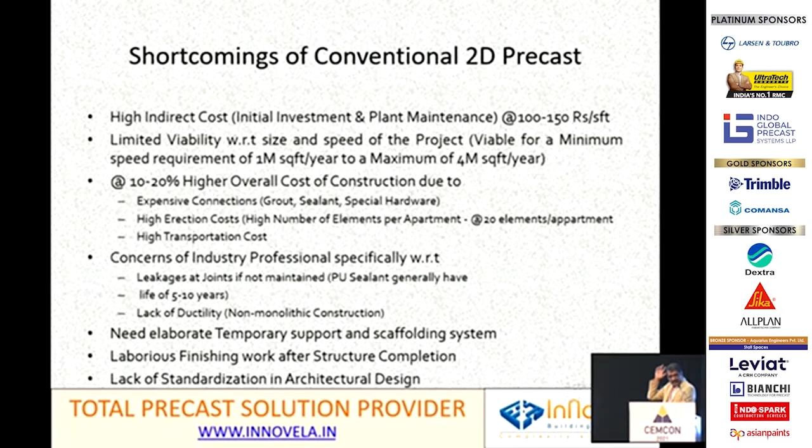So there are a lot of avenues where architectural designs can be improved to suit precast concrete technology. And if the client decides early, at an early stage, to adopt precast concrete technology as a strategy, then the architectural design can be developed keeping the precast concrete technology in mind, by having standardization in architectural design.

So what is the benefit of standardization that we are looking at? Because of optimum mold utilization, the reduction in capital investment will happen - that is only going to happen because of standardization. If I have 20 different elements to manufacture in a single apartment, then my cost of molds is going to be higher. But if I'm going to do that using only 7 or 8 standard elements, then of course my initial investment comes down.

The increase in project viability happens because of the lesser indirect cost, and the automation process can be implemented on such standardized units based on the efficiency requirement - what is the speed requirement. So to that degree, we can automate the processes. Of course, there is economy of scale which is involved once standardization comes into picture. And the last point, which is very important and which everybody needs to strive to go for.

We need to have precast products selling off the shelf, with the main contractor buying the stuff from precast suppliers and erecting it on their projects. That is what happens in Europe. The project is never awarded to the precast manufacturer directly. The project is awarded to the main contractor, and the main contractor's subcontractor is the precast manufacturer.

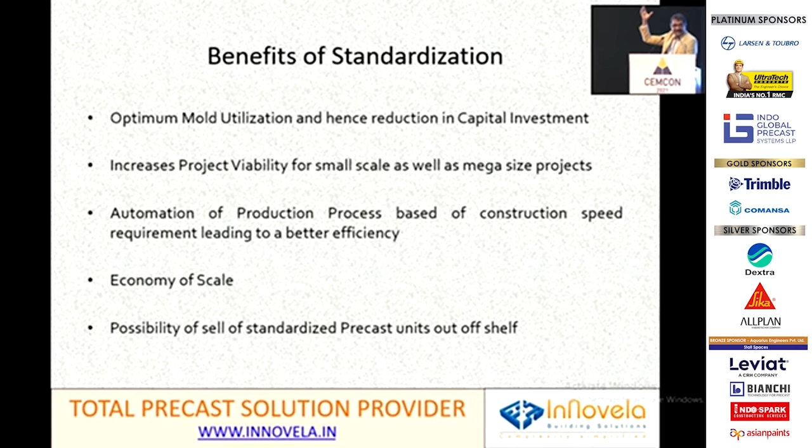So the precaster's role is only to manufacture the element and transport it to the site. And that is where the major possibility of what Amit's dream is, having a centralized plant, will come into picture or come true. So we're trying to do that.

So, introduction to out-of-box construction. This kind of concept has been in our mind for more than 3-4 years. In the initial 6-7 years we realized all the shortcomings in precast concrete technology. We said we need to improve it for India, because the same technology implemented in Europe, USA, Far East countries like Singapore, or the Gulf countries, may not work in India, because India is a different culture with different kind of living habits. So we need a solution which is India-centric, and that is where we developed this out-of-box construction approach.

That is what we are calling it. The aim of this construction approach is to achieve a high degree of standardization at the time of concept design itself, and second, to reduce the overall number of precast elements required per apartment, thereby reducing the cost of logistics considerably.

Now when we look at any residential apartment, the kitchen and toilet are the areas which can very easily be standardized. Nobody's fussy about kitchen size or toilet size — they're more worried about living rooms, bedrooms, and those kinds of things. So for example, for a 1BHK apartment, we say 2.4 by 2.4 as the kitchen, and maybe 2.4 by 2.4 consisting of 2 toilets as the toilet block. And maybe we can use the same for 1BHK as well as 1.5BHK, or maybe something different.

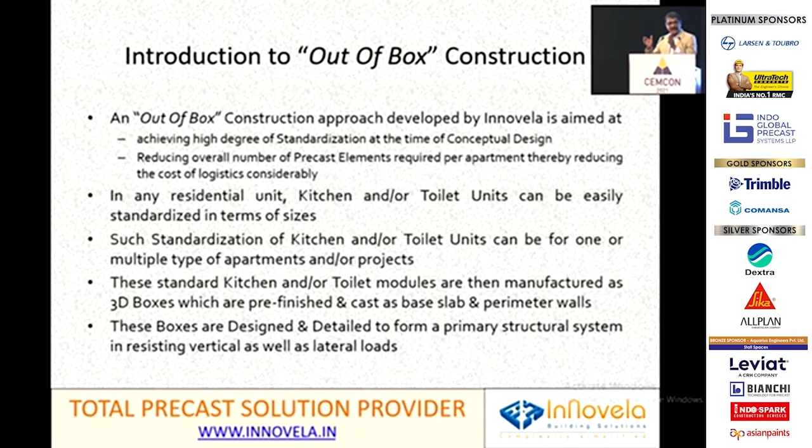What are the benefits of such construction? One is lower indirect cost — we are currently doing two projects using this concept, and we find that instead of 20 elements, I can do the same apartment in 12 elements. That means I'm reducing almost 40% of my number of elements, so my crane sizes and number of cranes required have reduced considerably, even though crane capacity requirement has gone up. My stockyard becomes suitable, and all my logistics become easier.

It also improves viability for smaller projects as well as mega projects. For example, I'll showcase case studies for two different projects. One project is 1,000 apartments to be built at a speed of 1 year — you can say 3 or 4 apartments per day. The other project is 1 lakh apartments, a smart city housing project, where we need to build 80 apartments per day. So from 4 apartments per day to 80 apartments per day, but the concept we are using is the same — that's the kind of scalability we are looking at.

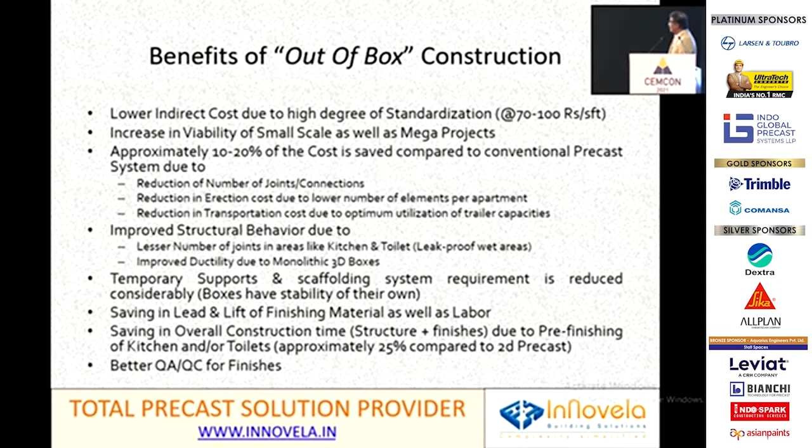That's the typical connection we are talking about, because the pods are manufactured with a base slab, and there's a peculiar challenge of erecting such kind of pods at a higher level. That is what we faced in L&T's first project, Boivada. We used this kind of system, or a very similar system, where we used WC and bathroom, very small units, 1.2 meter by 1.2 meter or so, 7-ton element, which was not pre-finished also because of some other reasons, since excise duty was there at that time. So it was better that we didn't finish that.

But now with GST coming into picture, it's a level playing field for everybody.

But what we found out is that the erection of such pods becomes very difficult, because the erection of the pods has to happen, and then the remaining structure comes around it. So we have improvised it in terms that on top of the wall of that pod, we have a corbel kind of situation, where you first put your slab on the lower pod. Once that access is there, then you erect the next pod, and screeding happens afterwards on top of the hollow slab. That is how, from an erection point of view, we have taken care of this.

And again, when it comes as an external joint, we are actually projecting out our base slab, so it hides my horizontal joint which is going to happen. And I'm totally avoiding my horizontal sealant requirement altogether. So that is what is saving my cost, and from a maintenance point of view, I'm not worried either.

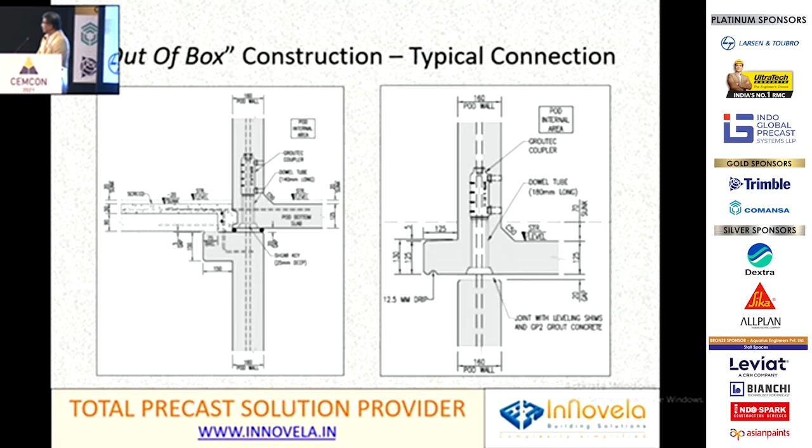Now we are going with the case study. This is the kind of apartment plan that has been developed.

Actually, this is the project where we need to do 80 apartments per day. So we were not really bothered about the element weight as such, but we wanted to really cut down on the number of elements drastically.

So what we did, we actually did kitchen plus toilet as one single unit. That's the L-shaped pod that you look at. And then the bedroom and living room is formed in conjunction with that. But my main load-bearing element is the kitchen and toilet unit, which is cast as a 3D element, a standard modular 3D element.

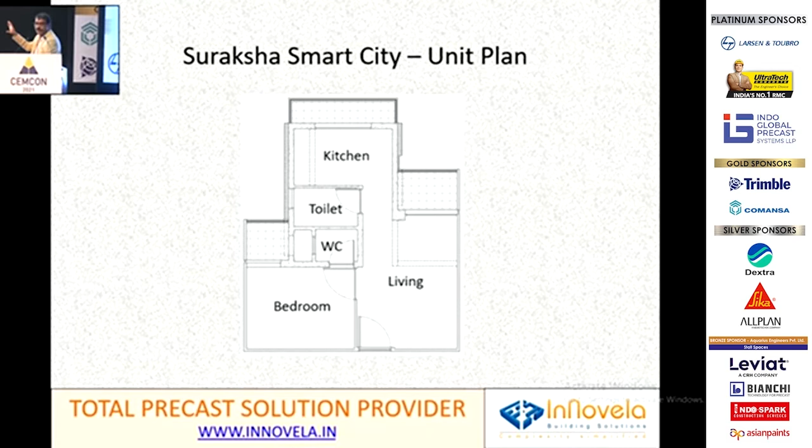This is the typical building plan. You can go to the next slide.

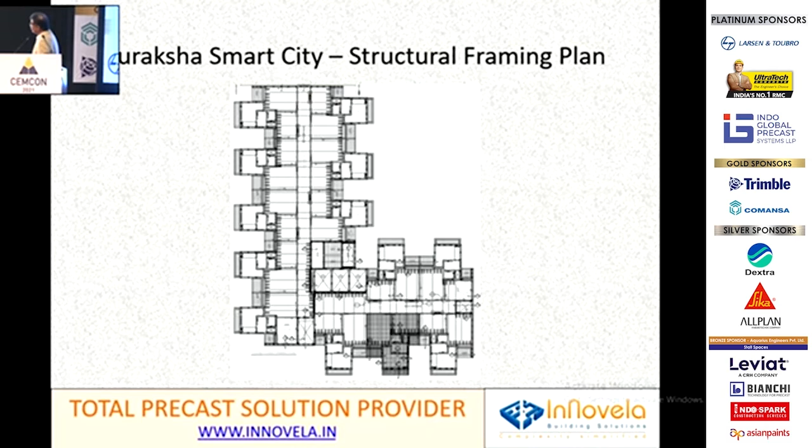Structural framing plan, and this is how the manufacturing of the pod is happening. Such 80 pods we are going to manufacture every day, once our state-of-the-art plant is going to be in position, maybe in the next 6 months' time. And we are having a lot of automated systems in order to achieve these kinds of things.

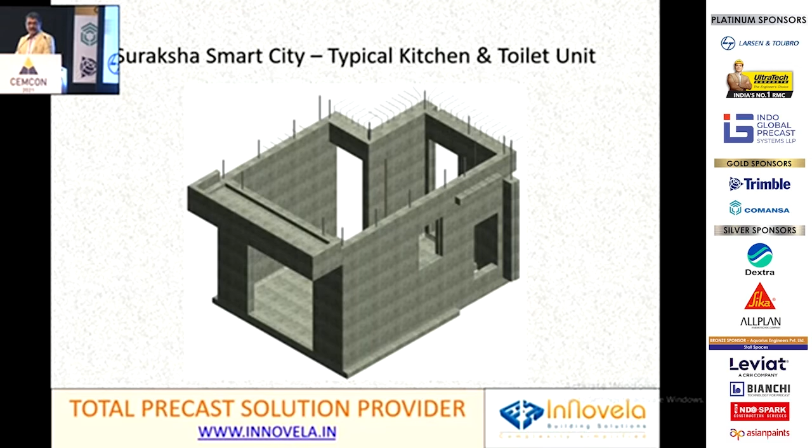Steam curing is the most important aspect of all those things, and it's a carousel system with which all these things will be manufactured. The base slab actually helps in doing that as a carousel. So all those things we are doing. There's kind of an animation which goes.

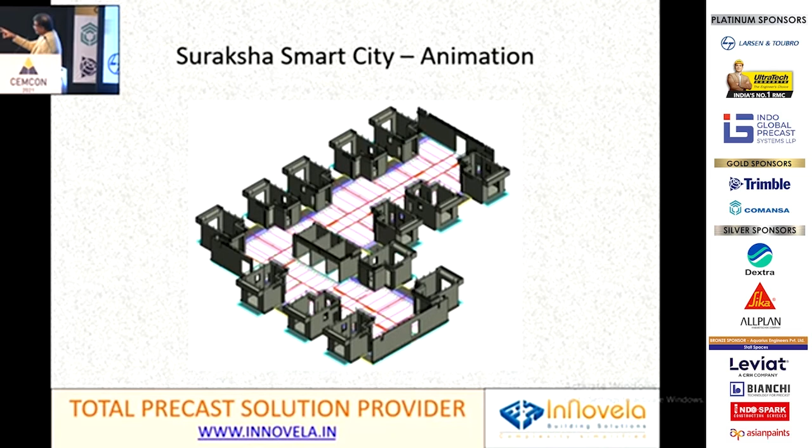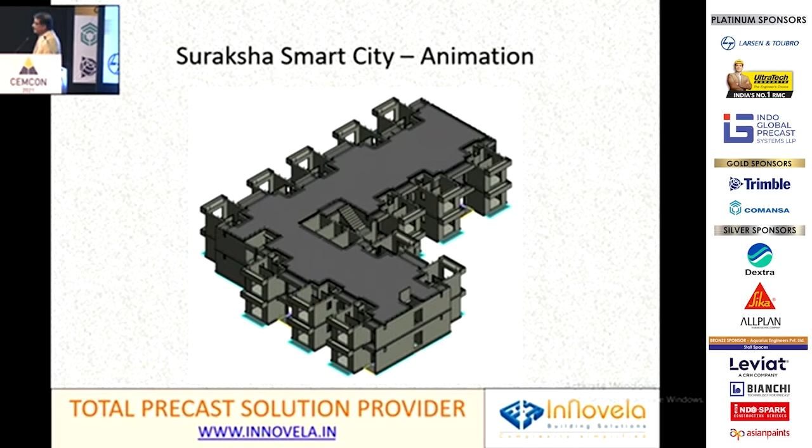So even the lifts that you see over there, those are also made modular. So we are trying to make as many modules as possible so that we can reduce the number of elements to as high a degree as possible. We can go to the next slide.

Another project is a 1,000 apartments project. This is the Light House project at Ranchi, driven by the central government. There are 6 technologies which have been shortlisted. 3D precast technology is one of them. Now, if you go to the previous slide, you look at that kitchen and bathroom.

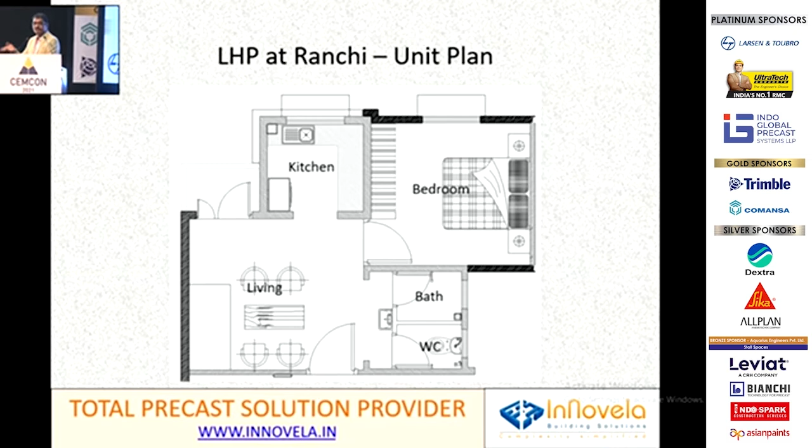So what we are trying to do over here, because these are only 1,000 kind of apartments, we wanted to create one single mold which can manufacture kitchen as well as toilet. So my kitchen is the same size, 2.4 by 2.4, and the bath WC and the passage that you see is also again the same size, 2.4 by 2.4. So I'm having only one typology of mold which can produce both these elements, kitchens as well as toilets. We can go to the next slide.

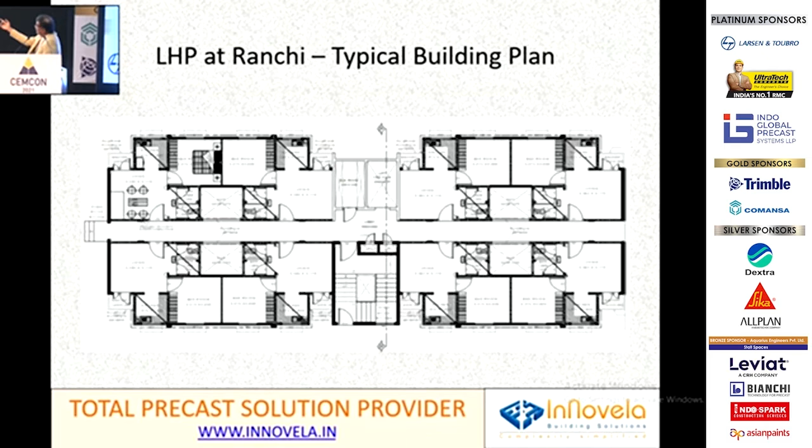And these then become my main load bearing elements. Next slide, please. Yeah. So my slab actually spans from kitchen pod to kitchen pod in the horizontal direction and the vertical direction also. My toilet pod is there as the main lateral stability element.

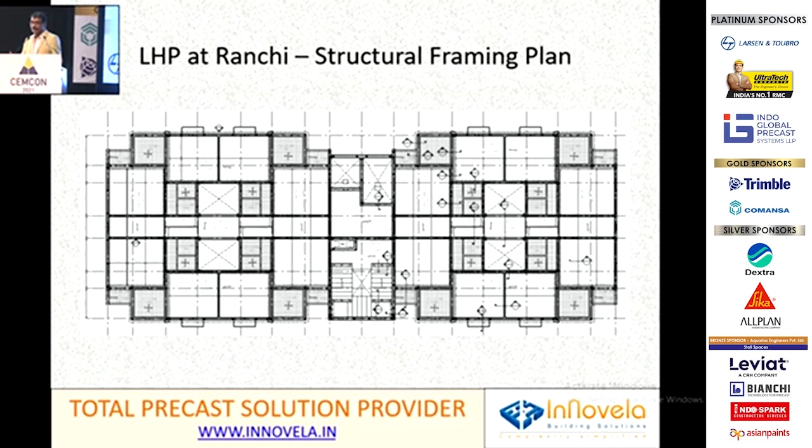And over here also, what we are trying to do is the slabs as pre-stressed solid slabs, and we have manufactured molds to produce these standard pre-stressed solid slabs. These are self-stressing molds which we have designed to make them portable, basically, to move them from one plant to another.

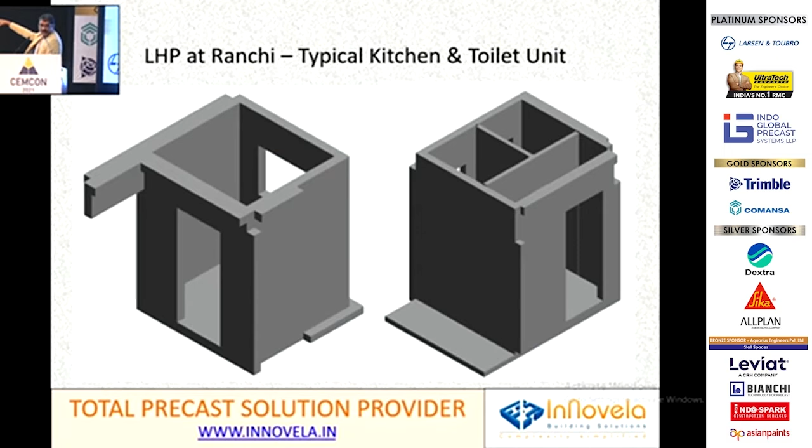We can go to the next slide, and these are the two kitchens and toilet kind of unit. The T-shape partition wall that you saw over there will be inserted at the time of finishing afterwards. That is 75 thick. So here we also have T-shaped walls. We have a passage slab which is kind of a bridge element, C-shape beam with parapet wall with connecting passage slab.

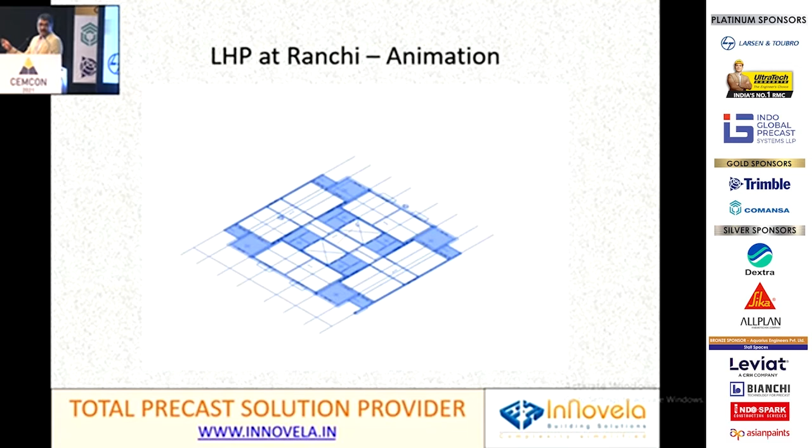If you go to the toilet unit, you see that bottom slab projecting out. That bottom slab is projecting out for half of the passage width, so half of the passage slab is also formed along with the toilet pod itself. Here our aim was, because this pod is going to have some kind of 12-ton weight, we wanted to have as many elements near to 12 tons as possible, so that we reduce the number of elements and we optimally utilize our cranes.

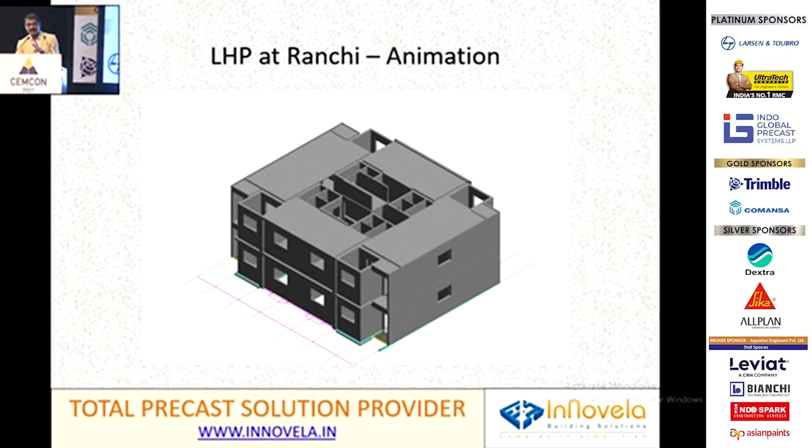And in this situation, what has happened is we have improved on the numbers. Even though these are 2 in number, the other elements we have reduced and we have matched them with the weight of the pod itself. Thank you.

Should we take questions from the audience? I'm also working as a waterproofing consultant, so my question is regarding waterproofing only. In your slide, it has been said that the 15 to 20% rise is only because of the cost of waterproofing, maybe. So if by any method that cost is reduced, can it be affordable construction for housing?

Waterproofing is one of the reasons. The other reasons are also equally important, like high indirect cost, and then there is logistics which comes into the picture. And waterproofing cost can be avoided altogether, like we are doing in one of our projects, Project Seabird at Karwar, which is a very high intensity rainfall area.

What we have done is we have detailed the joints in such a way that sealants are not at all required. But nonetheless, with those kinds of joints or detailing, your 2D elements also become very fancy elements with nibs and those kinds of things, which increases your mold cost or your other costs. So overall, you have got rid of sealant not from the cost point of view.

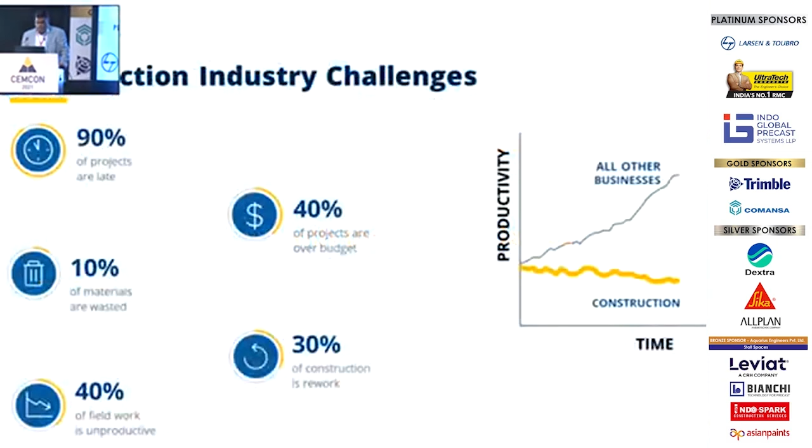So, to start with some statistics: when we talk about how our construction industry is growing and what challenges it has been facing, 90% of our projects are late. Late because of a lot of rework, late because of issues with the planning and execution. 40% go over budget; there is cost overrun. There are a lot of reasons basically.

10% of materials are wasted only because of improper planning, logistics planning, execution management, and even the failure of just-in-time systems. And 40% of the entire construction work becomes unproductive. We term it as muda, or waste, in lean construction or lean sigma principles. If you see the graph for other industries, over the period of time it grows. However, the productivity for construction has been declining.

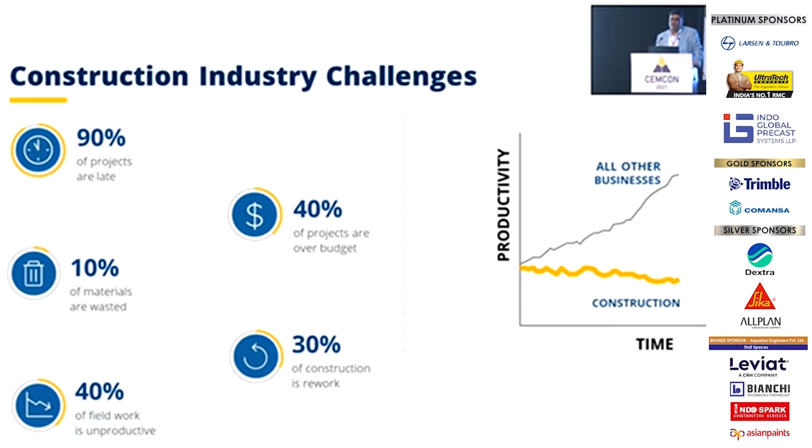It is only because of lack of adoption of new technologies, new processes and work methodologies in construction. If that gets implemented, there will be a paradigm shift and a significant change in productivity itself. Peter Drucker said it very rightly: if you can measure it, you can manage it. That statistic has been a collaborative effort of different surveys and statistical teams working across the industry. So I'm going to talk about 3 C's, which are constructible, content enabled, and connected.

We are in an era today where the entire project stakeholders, starting from the client, owners, contractors, different consultants, then execution teams, field engineers, and sometimes consultants sitting in different geographies, have to be connected. Connected to what? We have to create models which are constructible. If you can create a replica of any physical structure which is constructible without any clashes, without any rework, that reduces a lot of time and rework, and productivity increases.

In the previous session, it was very elaborately mentioned what needs to be changed, that is the pre-construction processes, so that standardization and modernization can happen, reworks and wastages are minimized, and faster construction can be achieved. So when we talk about constructible, Tekla provides you the platform flexibility as well as a feature-enabled product which can help you deliver these constructible models.

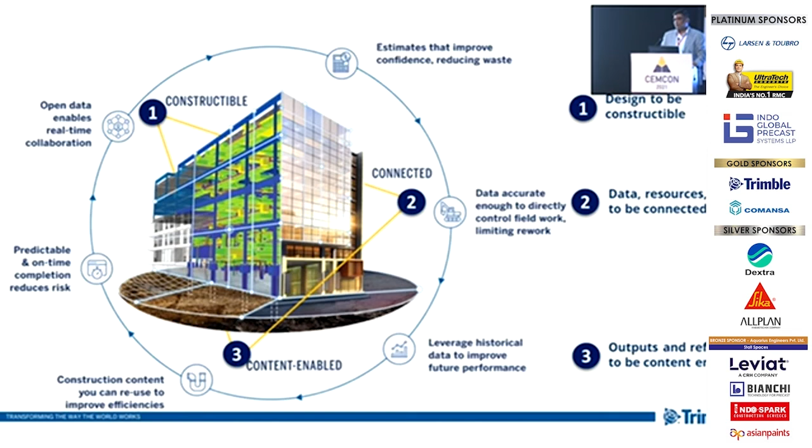And the outputs and references which are there, these are all content enabled, because every other information that gets shared should be linked to some or the other relevant information from that particular project. So it can be located, discussed, reviewed, commented, and executed. So when we talk about how Tekla differentiates from other tools in the market, Tekla is one of the finest tools, the premium product in detailing, and also the BIM processes.

So you can see the left-hand side is the model which is created in Tekla. Every other detail that goes into the wall, or maybe into any element of a precast project, is detailed out very neatly. There is feature availability to enhance the detailing to LOD 500 or even more than that, as compared to the other technologies which are available.

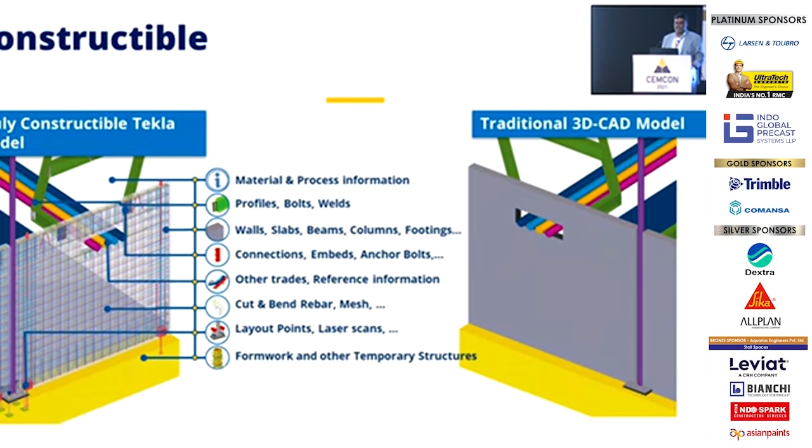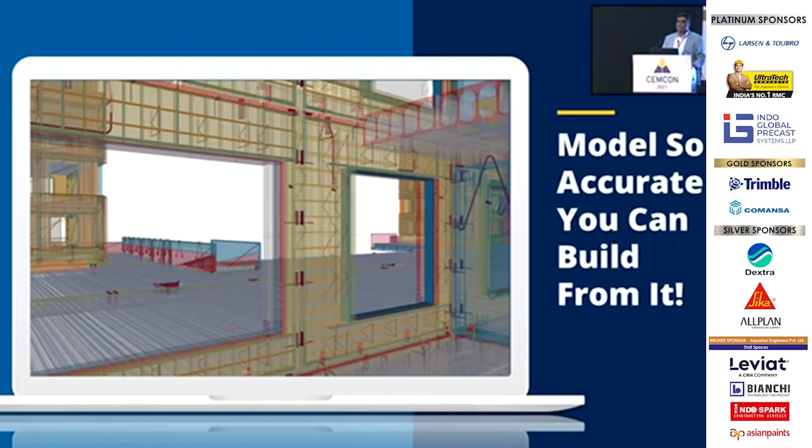So the detail of every particular piece that goes into the construction, which needs to be accounted for, costed for and executed for, or even planned for the logistical requirements, Tekla particularly gives all the details. The model is so accurate that you can build from it. You don't have to refer to any 3D drawings or 2D drawings, or go to the different sections of it. The BIM enabled tool itself gives you the flexibility to view and visualize it. AR, VR, and other aspects are also associated with it.

So when we talk about the connected feature of our product Tekla, there are different stakeholders, as I mentioned. The owner is responsible for the capital program management. The general contractor is responsible for the project management, quality and schedule, as well as design control sometimes, and engineers are responsible for the design of the product, as well as the architectural and structural detailing of the same.

So with Tekla, we have collaborative platforms also, through which the data exchange is very seamless. The data exchange gives the audit trail also. So everybody who is sharing, viewing, and editing the data is made responsible and accountable for the data that goes in and comes out. So apart from that, I can go to this.

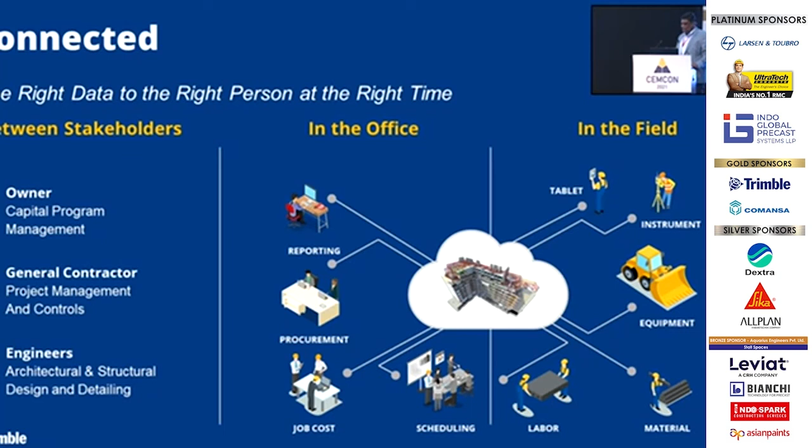We believe that the greatest challenge in construction is the lack of quality. It's only because of the rework and other unproductive wastages, and coordinated and timely information which is not available. Most of the times in construction, the information is shared through shared drives or emails. So this tool from Trimble enables data sharing through a single source of truth, and it is accessible to everyone across different platforms.

Mobility is also available. Tekla software from Trimble dramatically improves the way the construction business works and collaborates, providing the most complete constructible information management solution. So with content enabled, you can create beautiful concepts for your projects in the shortest possible time. You can compare different alternative options and come out with variance reports in terms of the variation in quantity, the variation in cost, and the time required to execute each of them separately.

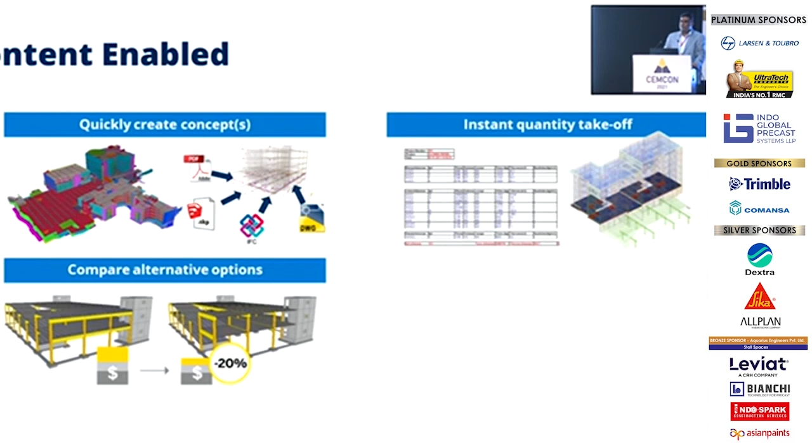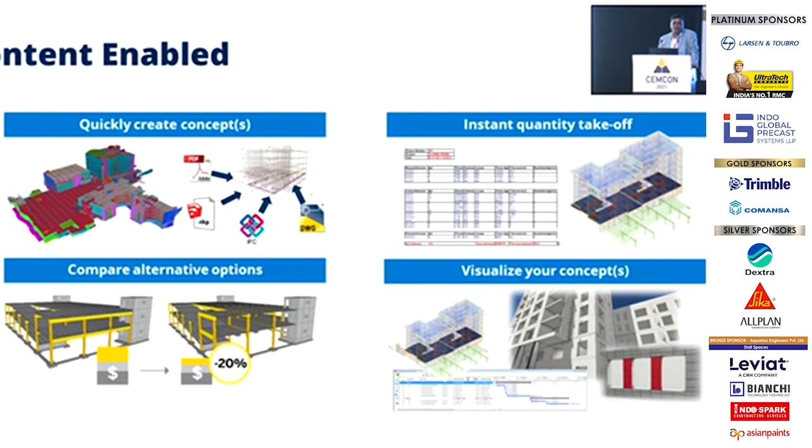You can get the quantity takeoff at a click. You just click the quantity takeoff and the reports are generated. You can even generate your bar bending schedules, your concrete reports, and various other material reports, including your embeds and other inputs going into the construction. You can even visualize these concepts, see these 3D models, and also the time-phased construction sequencing along with that. So you can detail any project or any structure using this.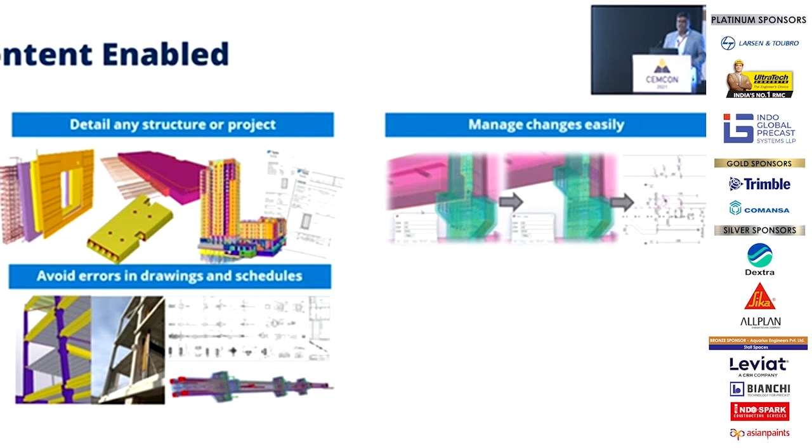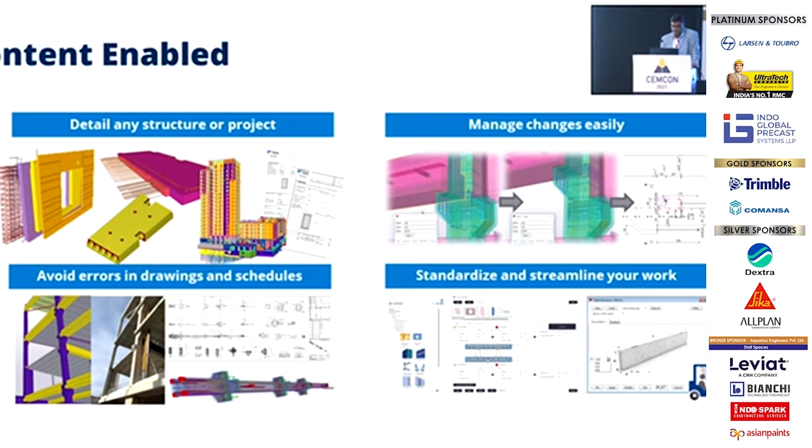You can avoid the errors in drawings, because in BIM, if you change any particular element or the property of that element, every other referral drawing also gets changed. So you can manage these changes easily. You don't have to browse through different drawings and different models to change the piece of information that has been revised. Standardization has been a very important topic today, so you can also standardize and modernize along with streamlining your work with different agencies and different processes.

So this is for infrastructure also. We have tools for linear projects, mainly highways, metros, high-speed rails, or the semi-high-speed rails and so on. We have solutions starting from alignment planning, wherein we can come out with various options considering the environmental, geological, as well as the residential and industrial challenges. So it will provide you multiple alignment options.

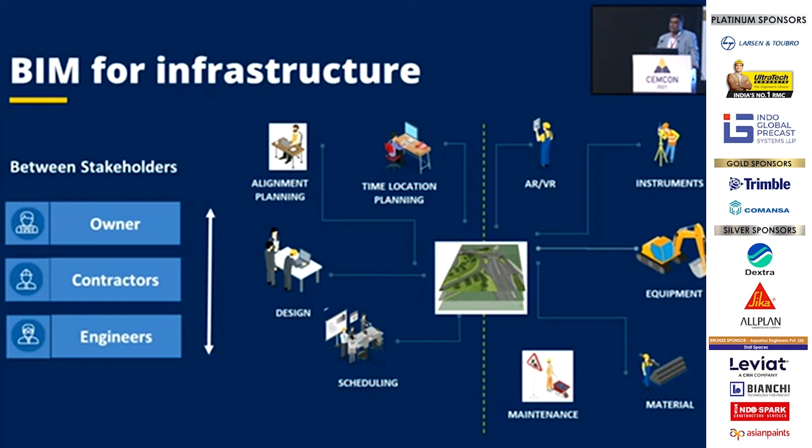You can select them, you can design them, you can do the project management also, you can do AR and VR also, and all that design information goes to the different equipments working on the site, and the design is executed. Even after that, during the O&M phase, these particular products and information can be seamlessly integrated with each other.

I need the video to be played. Yeah. So this.

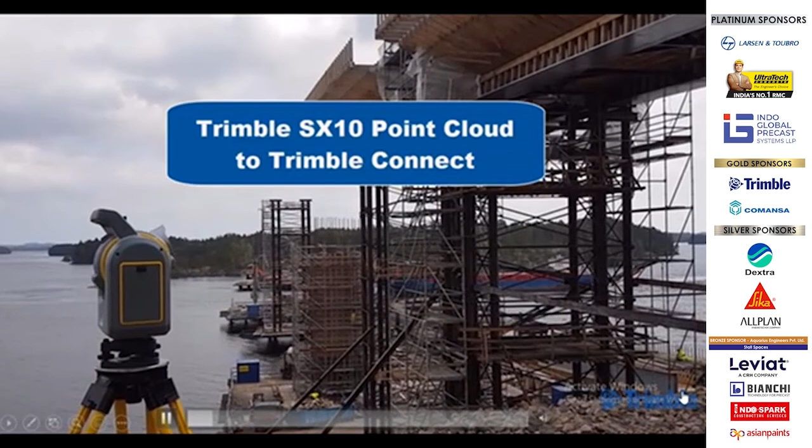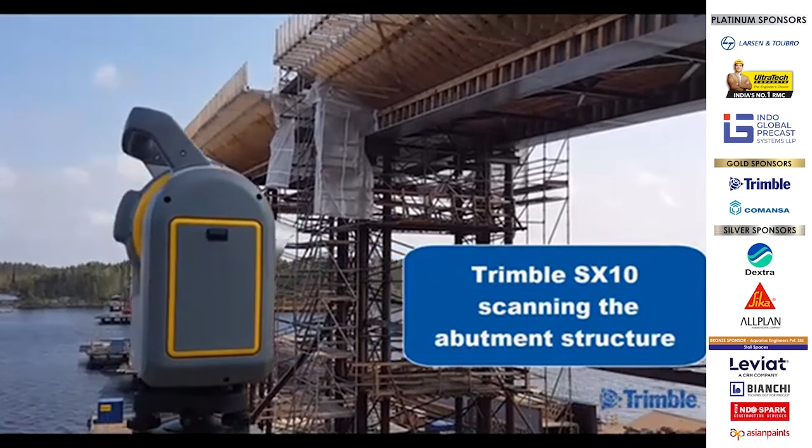So what I was talking about, BIM to field and then field to BIM again. The design was created using Tekla Structures. It went to the field, it was executed. This is SX10, which is the scanning tool from Trimble. It is scanning the entire abutment structure. Once it is scanned, it collects the point cloud data, and it compares it with the BIM design that has been created using Tekla.

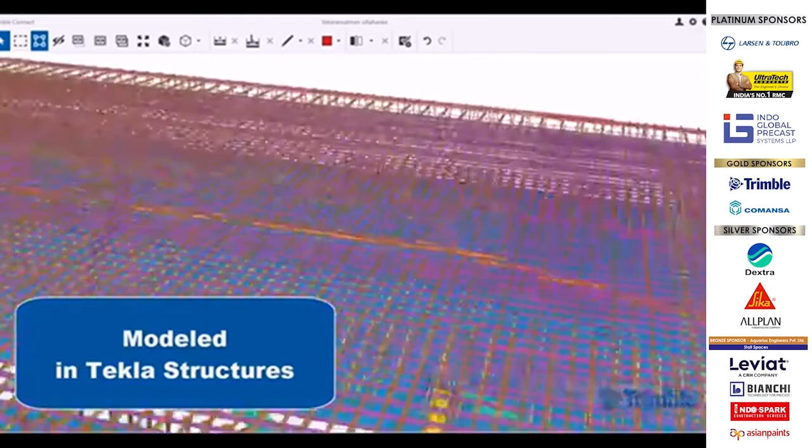This was the design, and that was the point cloud. You can see the variance analysis can be carried out using this tool. So we have a complete suite of products available, which can help you from conceptual modeling till the O&M phase. This was the point cloud data overlapped with the design, and you can see the deviations, if any, and this deviation analysis can be carried out.

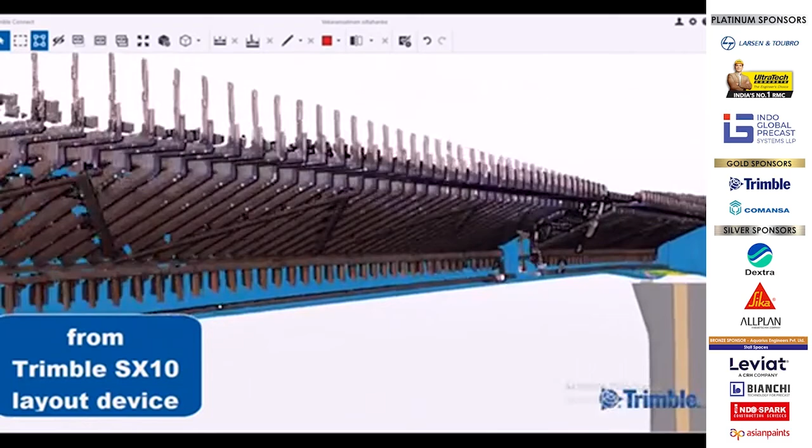You can skip that now.

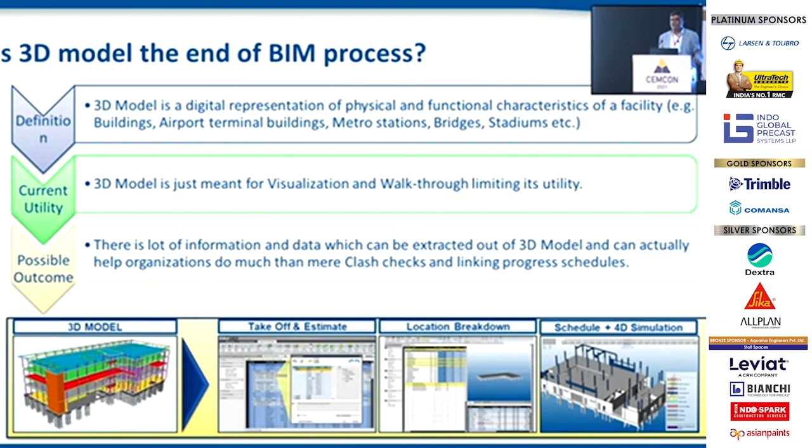So I'll move on to the next product in the offering. A 3D model is generally prepared and shared across different stakeholders. However, yeah. This is done when you are placing the elements? It is done only after the execution, like your abutment. The difference between what we have designed and what we have placed. Yes, so the design goes into the field, and from the field it is scanned again to the BIM. So it does the deviation analysis between what is in the field and what was designed, with the scanning device. Yeah.

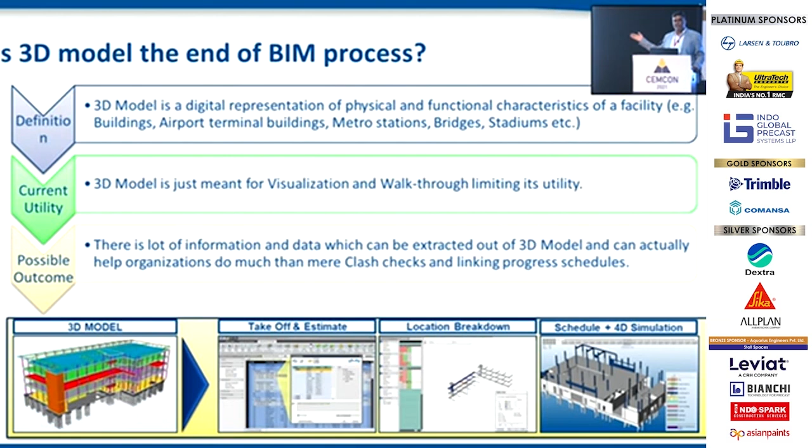There is a tool again from Trimble which does integrated 4D and 5D BIM. 4D is time, and 5D is cost management. You can create estimates within the tool itself. BIM is the origin for 4D and 5D. Say you have a column structure, you need different cost line items when you are creating a BOQ. What you need as input is labor and material cost, as well as the equipment and machinery required. And you can even plan the sequencing of your zones, your floor plates, or your cluster of buildings.

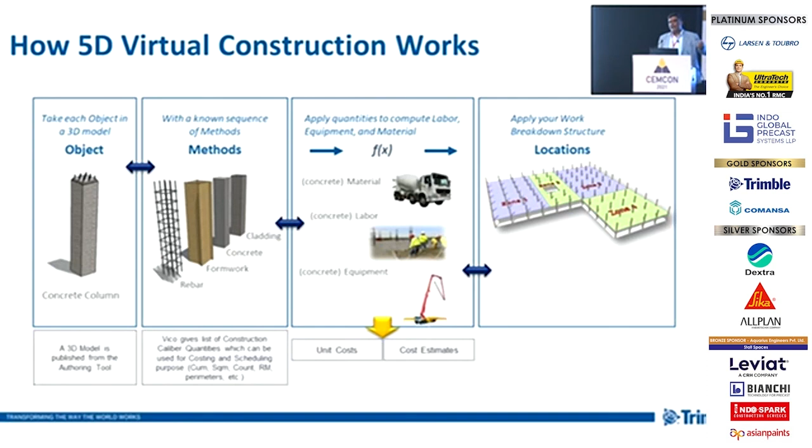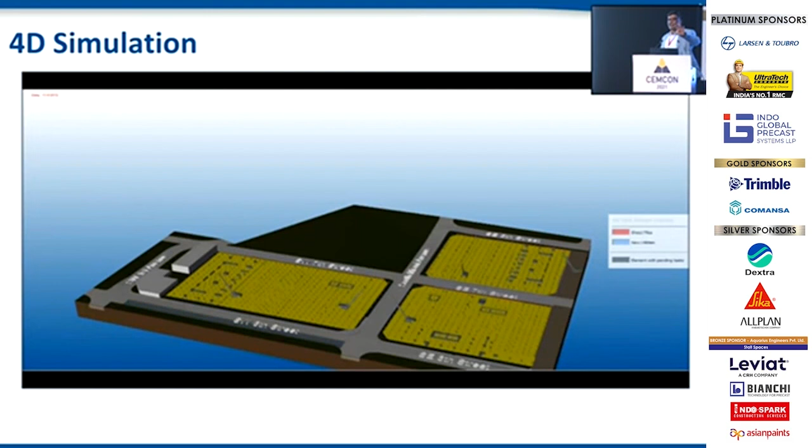With this you will be able to achieve cost reports, quantity reports, schedule reports, resource reports, and material reports as and when required, as well as the cash flows. You can also do tender management with these tools. This is the possible outcome of the entire integration with the model: cost, quantity, time or schedule, and the simulations can be generated using that.

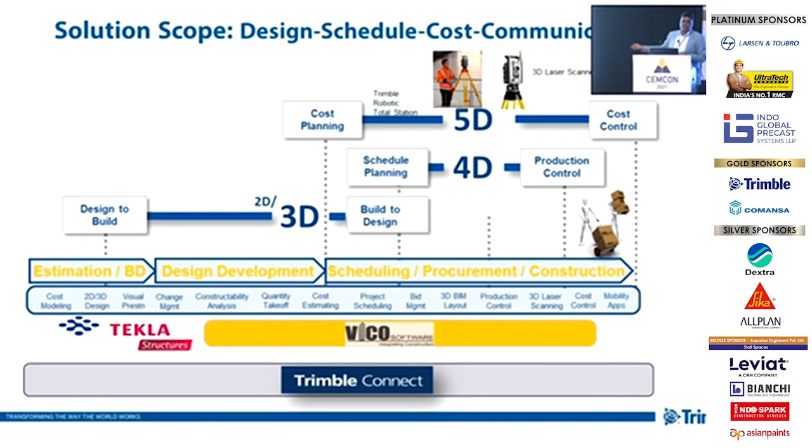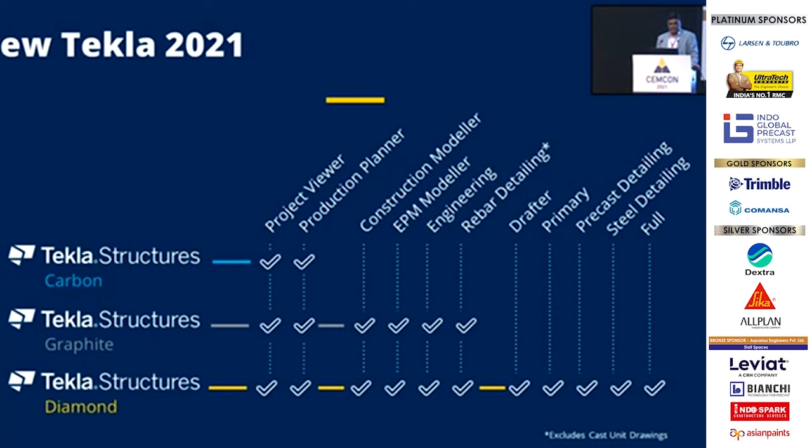If you talk about the overall life cycle of the project, we have different products starting from the conceptual model till commissioning. We have 3D, 4D, and 5D tools, and also the field scanning tools. This entire suite of products is connected through Trimble Connect, which is a collaborative common data environment from our side. There are Tekla products newly launched in 2021. The earlier ones are discontinued and not available today. We have Carbon, Graphite, and Diamond suites of products from Tekla available on a subscription model.